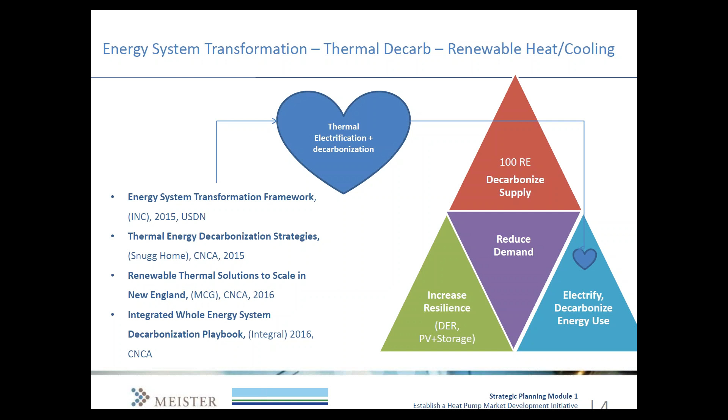So, all right, let's jump in. No more intros here. So we're jumping into Module 1. So there's 3 pieces, A, B, and C. We have framing the initiative. So we're going to jump into why heat pumps in the framing of the energy transition. How heat pumps work, look at some of the technology details. That's what Meister's going to present next.

Then we'll dive into mapping your system and forming your advisory board, so looking at who all is in your area, naming them, and sort of placing them in this sphere of influence, if you will. And if you're familiar with the Integral Playbook, they talked about that. So we'll be drawing on that in that section. And that will help you form your advisory board if you haven't already.

And then we're going to look at some of the basic barriers and opportunities. Of course, we're going to ask you to take that further in your homework for the local context, but we also are going to just address some of what the typical barriers and opportunities are when we're talking about launching our heat pump programs. Sarah, and then, yeah.

I just wanted to note for everyone, while this first part, framing the initiative, may seem like it's review or even redundant for some of us, part of the reason that we're going through these slides is that this has all been built so that it can be support material that you can use as you go out to form advisory committees or to build stakeholder relationships. So think of all this as also materials that are available to you for your use.

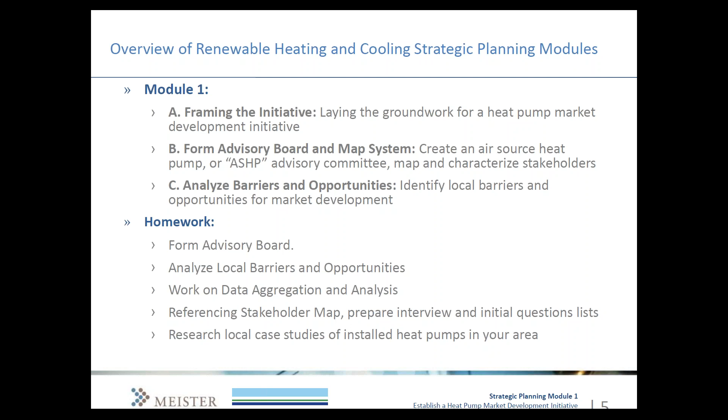And then the last thing is the local case studies. So this is what we refer to as the installation baseline, and that's looking at installed heat pumps in your area, and the city and the advisory board will lead on pulling out some of these local case studies, but the consultants will lead on compiling the case studies. So that is where we're going to dive into all these pieces. That's what we're doing today, Module 1.

Next month, Module 2, we're going to move into D and E. So we're going to do the market development assessment, establishing the baseline of heat pump systems installed to date. Segmentation is looking forward, so finding that high value target in your area, and then we'll start to map strategies on how to launch and get heat pumps in those buildings.

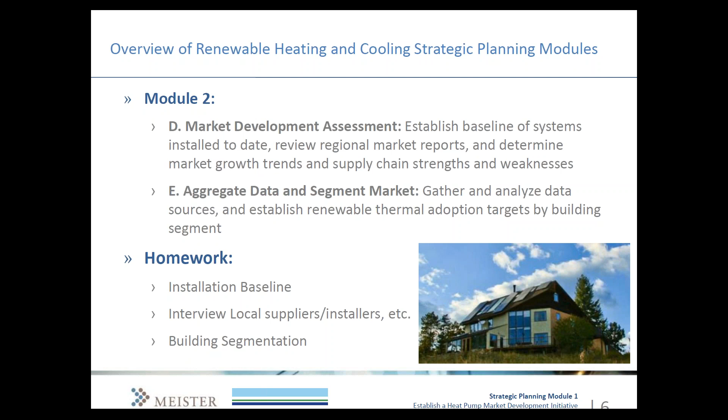So the homework for Module 2 is going to be completing the installation baseline. So again, looking at how the heat pumps in your area are performing, then interviewing the local suppliers, installers, contractors, and then finalizing the building segmentation.

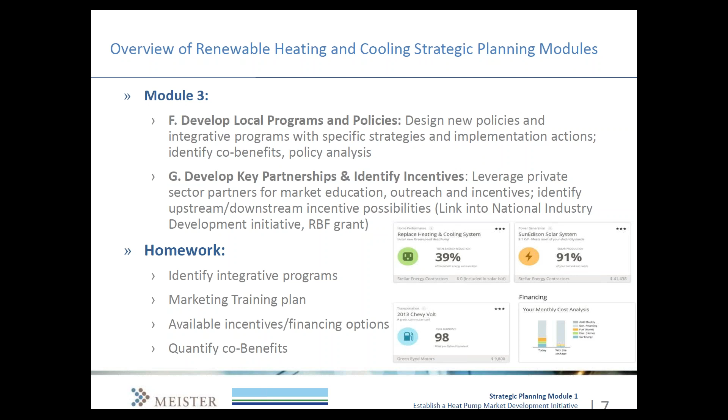So the homework coincides with those pieces. So you'll end up identifying what your integrative program will look like, the marketing and training plan for the installers, and then we'll also identify the available incentives, start to tee up the third-party financing options, and quantify the co-benefits. So that'll be, again, not all led by you. We'll be splitting up who does what. You can see that in the other PDF.

And then the fourth module here is the final piece, developing the implementation plan. Here we'll basically put all the pieces together, build the roadmap for your renewable heating and cooling launch, and actually coordinate the partnerships necessary for financing, and we'll do lots of homework there. So develop the full plan. We're going to develop the engagement and outreach plan, as well as the training dissemination plan. Hopefully we'll have a messaging outreach partner by this fourth module to help you frame what your outreach will look like to the key actors and segments that you've figured out through this process.

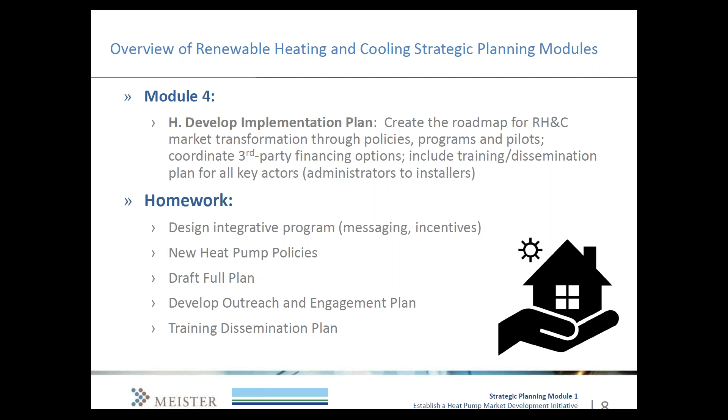Sorry, this is Laura. Can I ask a quick question in terms of timeline for these modules? Is that laid out somewhere? Yeah, so sorry, actually it was on the kickoff call, but I didn't put it back in here, but they're monthly. So it's basically the third Thursday of every month. For the next 4 months, we'll go through these 4 modules. So we encourage you to have your advisory board meetings in between there to help move the homework pieces forward and whatnot.

So that's March, April, May, and June, and then in July we'll have a 5th webinar, but that will be not presenting content as much as synthesizing what we've learned and putting it all together. And then in August, I haven't got the final date yet, but hopefully we go to Rockefeller Brothers for that manufacturers convening end of August, early September, something like that.

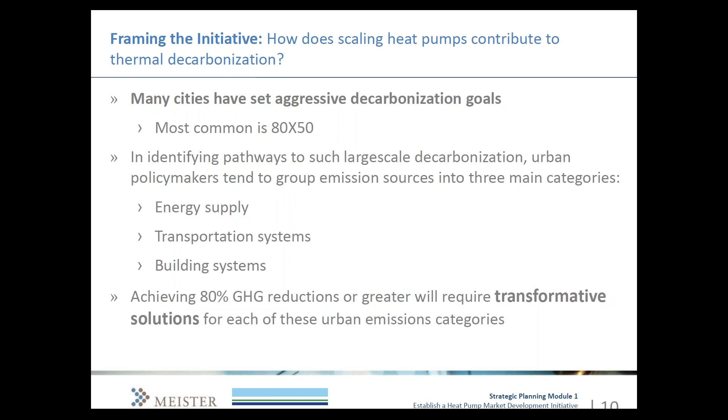In order to begin that process, policymakers have started grouping greenhouse gas emission sources into 3 broad categories. And this helps with identifying strategies for reducing those emissions within each sector. Commonly, those are grouped into the 3 on the slide, so energy supply, transportation systems, and building systems. And I don't need to tell you all this, but achieving that level of reduction will require really transformative solutions for each of those emissions categories. Next slide.

So luckily, a number of efforts have already begun to identify and recommend policies and programs and technical solutions that can help achieve that type of transformation. And Sarah touched on a bunch of those at the top, particularly some of the CNCA energy systems transformation projects, which really set the groundwork for how we talk about this type of project. I might add to that list an ongoing project we're doing with the Innovation Network for Communities, Inc., and CNCA, and the Kresge, Summit and Energy Foundations that is focused more on the intersection between energy transformation and equity planning.

And I was excited actually to see we have a few people from CU Boulder on the call, because you guys have done some really interesting work on that front too. But this project kind of characterizes the ways to improve social equity as a result of this systemic change. And we're anticipating we'll have some final reports from that process in April or May, so we'll be sure to send them your way once they're available.

But regardless, each of these efforts have identified numerous large-scale solutions for how to reduce emissions in each of those broad sectors. And most of those solutions are already being implemented or could be implemented using today's technology. So a few I highlighted on the slide here include leveraging franchise agreements to encourage utilities to scale up the procurement of renewables or the mix of renewables in their generation portfolio. So Boulder has done a lot with this, and also looking into municipalizing, as has Minneapolis.

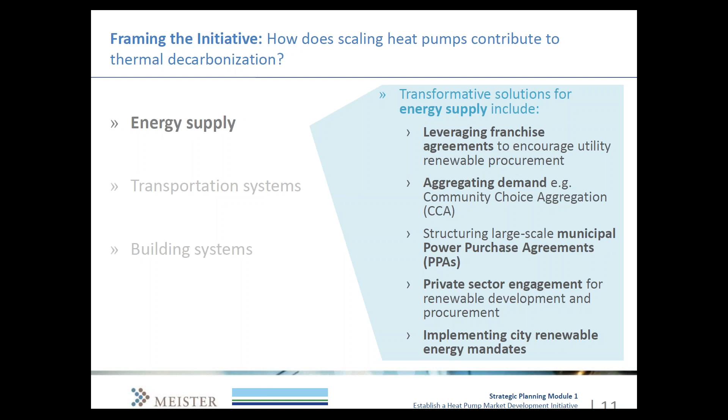Of course, partnering with the private sector for renewable development and procurement is big, or otherwise encouraging the private sector to do procurement on their own. Cities have a lot of leverage, but having that partnership and private capital can go a long way too. And in some cases, implementing energy mandates to achieve this. So I think San Francisco recently adopted a solar mandate for new construction shorter than 10 stories. So these are all just a quick snapshot of kind of the cutting edge of strategies that leading cities are employing for transitioning energy supply. Next slide.

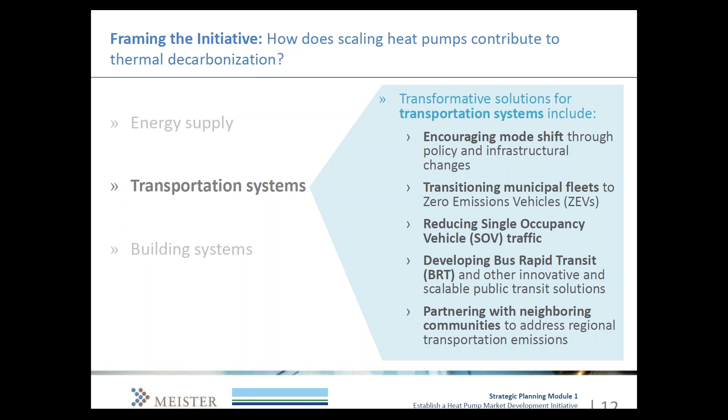Next slide. And then, of course, there are the building systems, which is what this initiative falls into. So among those are reducing building energy consumption through weatherization and efficient appliance changes, transitioning, of course, to renewable heating and cooling systems like we're working on here, mandating efficient operations and appliances in new construction, and utilizing waste heat from industrial processes or through combined heat and power generation. All of those are important and kind of trending strategies for transitioning building systems emissions.

But if you go to the next slide, these top three are all fairly significant components of this particular initiative. So the process that we're working on here will contribute to each of those transformative solutions. So next slide.

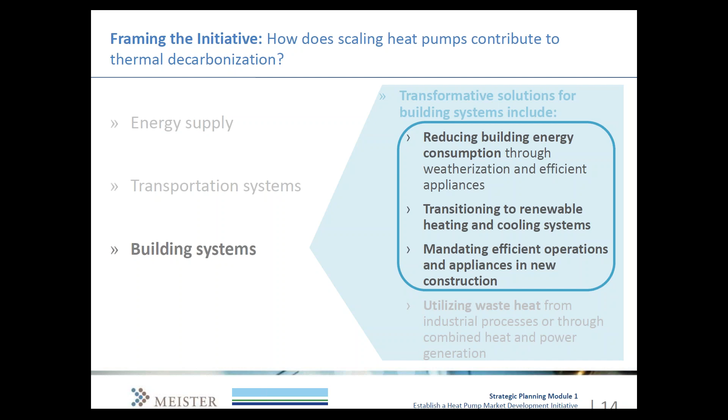So that's all helpful framing, but it still begs the question that we've had at the top all along, which is how does scaling heat pumps contribute to thermal decarbonization? So generally speaking, renewable heating and cooling is defined as technologies that can utilize renewable energy sources to provide space heating and cooling, domestic hot water, and process heating.

And today, there just aren't any perfect solutions available or scalable. Biomass has some controversy around it and can spark heated debates around how to conduct carbon accounting. Solar hot water can be great, but can't serve year-round in most temperate climates. And heat pumps rely on grid electricity to operate. That said, unlike most incumbent heating technologies, heat pumps have the capacity to run on exclusively renewable energy. And that is a big part of why we categorize them as renewable heating and cooling technology. And they contribute to the process of electrification, which is currently being explored in many leading jurisdictions.

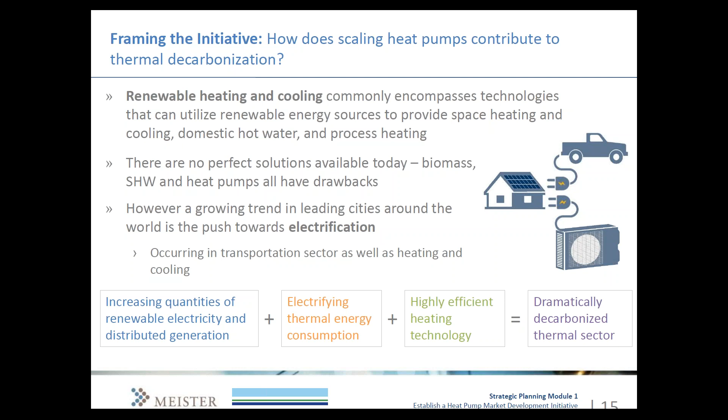I'm sure you all got that email from Brett earlier this week with the timely article about the President of California's Public Utilities Commission advocating the need to not only transition to 100% renewable electricity supply, but to actually leverage electricity as a fuel to cut into the market share of oil and natural gas. That, he stated, is what it will take to reach a target like 80 by 50. And it's that same process of electrification that this initiative is driving towards. So next slide.

So of course, the method by which heat pumps contribute to decarbonization is clearest at the building scale, where they can directly displace high carbon heating sources, especially oil and propane, and even pair with on-site solar, which together can provide building-wide decarbonization solutions. But for system-wide benefits, those can only really be felt if they're paired with city or regional electricity supply transformation efforts, such as those listed earlier.

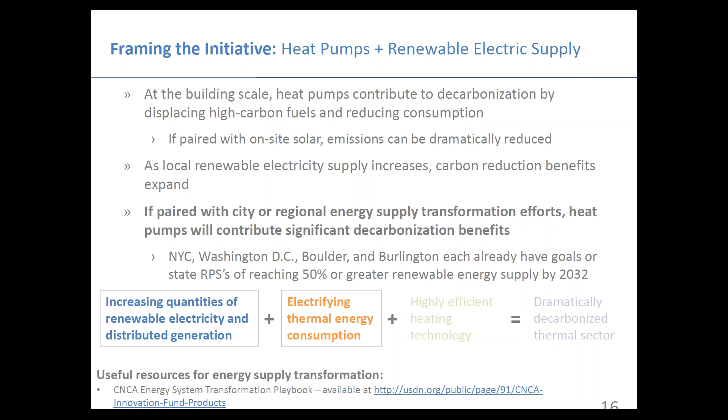But each of the core cities involved in this initiative already have significant renewable energy goals, and in general, renewable energy is a few years ahead of thermal in terms of the transition process. So having that in place and then pushing for increasingly aggressive targets and greater and greater percentage of renewable electricity supply in each local grid will just expand those decarbonization benefits, especially as things become more and more electrified, both on the thermal side and on the transportation side. Next slide. Great.

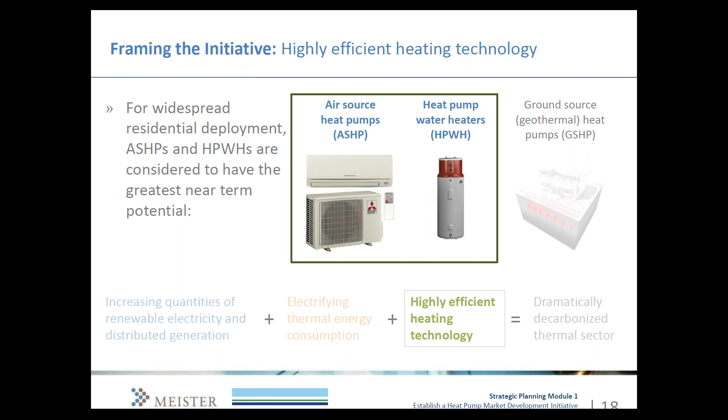So in addition to this type of city-scale renewable supply transformation, you need, of course, the high-efficiency heating technology. And of those, these three are kind of the most commonly talked about. Next slide. For widespread residential deployment, generally we consider air source heat pumps and heat pump water heaters to have the greatest near-term potential. And that's largely just due to flexibility and cost for urban areas, though of course ground source has a lot of potential as well. Next slide.

So some of the reasons that these two are particularly promising is they can offer year-round performance. So modern cold climate heat pumps provide heat on even extremely cold days, but I'll talk about that more in a minute. They also offer high efficiency cooling, which can help reduce summer load if displacing older air conditioning units and provide greater comfort as summers grow increasingly intense. And they're an extremely flexible technology. They can be adapted to so many different home layouts, sizes, and locations, which is really important for the diversity of urban housing stock.

Some common model differences I might quickly run over include ducted, which of course integrate into existing ductwork and utilize standard air handlers to distribute heat, or ductless, which have indoor fan heads installed, which are then connected to outdoor units just through narrow refrigerant pipes that run between.

They can also be used to serve a single heating zone, in which case they're commonly more of a supplemental heating source, or multiple zones, in which case sometimes they can be scaled up to serve an entire house, especially if they're integrated into ductwork. It's worth noting that in the Mid-Atlantic region, where DC is, a far greater percentage of heat pumps serve a whole home and are ducted. But in other areas, it's a little bit more common that they're supplemental or partial heating solutions.

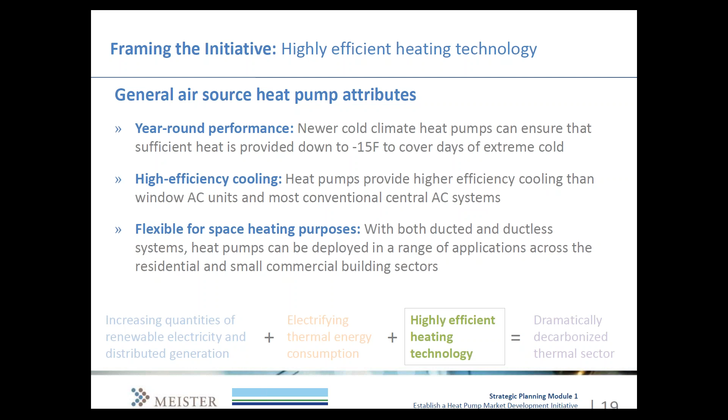Next slide. So as a technology, though they also run on electricity, air source heat pumps are fundamentally different than electric resistance, and actually than most counterfactual heating systems, in that rather than creating heat, they transfer heat in and out of a building. So the technology that they run on is functionally pretty similar to a refrigerator, which of course has coils on the bottom that are usually hot to the touch, and that's because they're transferring heat out of the inside of the fridge and distributing it out in the space around it.

And the heat pumps kind of do that in reverse, though they can do it both ways. They use the outdoor air as a heat reservoir to provide heating and cooling and transfer that heat either inside the house for heating purposes or from the house to the outside air for cooling purposes. And because that ability to transfer heat depends in part on the amount of heat available in the surrounding air, heat pumps' ability to serve a whole heating load can depend a little bit on the climate zone or the season or even the level of insulation or weatherization that a building has. But that's also changing as the technology grows increasingly advanced.

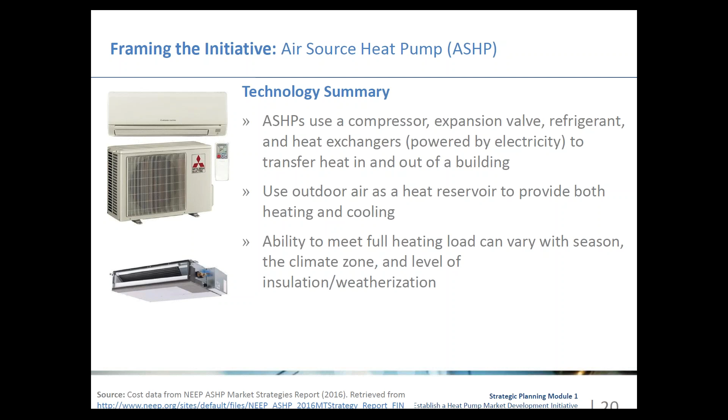Next slide. Let me pause there for a minute before I continue on with the heat pump distinctions. Does anyone have questions so far on what we've covered?

All right, forging ahead. So as previously mentioned, these are particularly versatile technologies, and that is in part represented in the price. So a single zone mini split, as it's commonly referred to, can run for about $4,000 for its full installed cost, whereas whole home solutions run up to about $13,000. The top picture on that slide is an indoor head of a mini split, and the bottom is the common air handler for a ducted whole home solution.

So that range in pricing and corresponding range in applications is pretty unique to heat pumps, which makes them suitable for so many different locations. They're also relatively cost-effective compared to ground source or pellet boilers or some other renewable heating and cooling technologies. Of course, the prices are usually higher than counterfactual heating systems, but especially in a place like DC, where most people will want an air conditioning unit in addition to a heating system, getting both in the same unit can save a significant amount of money overall. And with the resulting monthly savings when switching from electric resistance or oil, heat pumps will ultimately pay for themselves despite the higher sticker price.

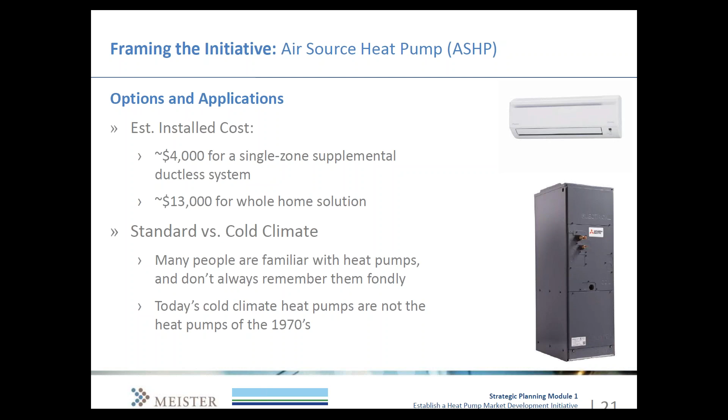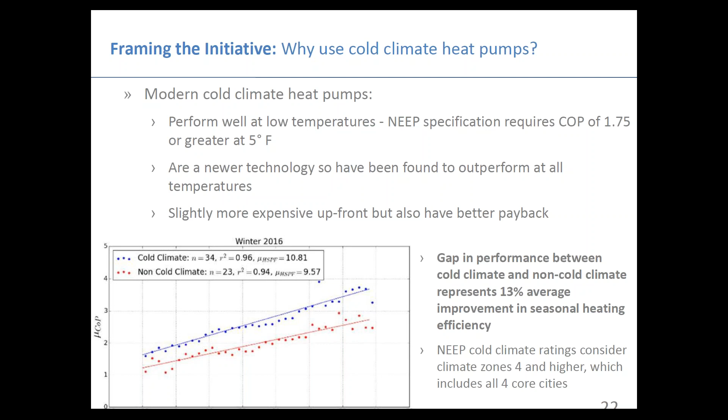Yeah, I fully agree. I think that's a really good point. We need not get locked into a full replacement approach, and in some cases displacement makes a lot of sense. Great. Yeah, I also agree. I was talking more just about the distinction between cold climate versus standard, but certainly there are many other distinctions that can be made or ways this technology can be adapted. A lot of the benefits you'll see will depend on the scale of the retrofit that's needed, and so utilizing existing heat distribution infrastructure is going to make a lot of sense. Great. So Sarah, you want to jump to the next slide?

So the other main technology we've been thinking about for this initiative is heat pump water heaters, and they function pretty similarly to air source heat pumps, but rather than transferring heat from outside air into air within a room or into ductwork, it transfers heat into a water tank. Those water tanks sometimes incorporate electric resistance elements for high usage times, because the heating can take a little longer to regenerate, so if you have a whole bunch of people showering at once, it can be beneficial to have that electric resistance backup. But generally, they function quite similarly to an air source heat pump.

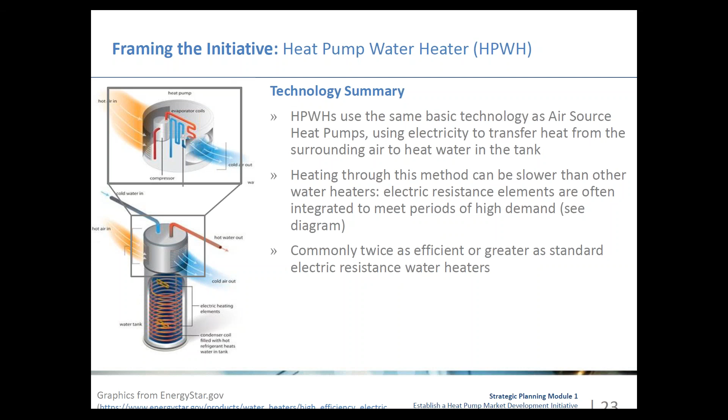Next slide. Can I ask some questions? So you said commonly twice as efficient as an electric hot water heater. Do you have it compared to maybe a condensing gas boiler? I don't have that comparison offhand, but I can certainly track it down. Okay, and the other question, I guess this is actually benefits and challenges: what size building would you say is really the limit for putting in one of these, or are there issues putting in a series of these that larger buildings could take advantage of?

I know that a standard residential one is usually about a 55-gallon tank, and so I think that would be kind of a single-family or 1 to 2 family solution, but I think there are larger tanks. Do you want to jump in there, Neil?

Yeah, I was going to say on the condensing boiler, y'all correct me if I'm wrong, but that gets what, efficiencies of like 90, 95%, is that right? Generally for a condensing boiler? Yes, around there. So the energy factor, do you remember, Nate, on heat pump water heater, right? Like 2 or 3? That's right. So in theory, it is more efficient.

There's this really interesting debate that we should wade into at some point about site versus source energy use as well, right? A lot of policymakers will try to take into account the transmission distribution losses of electricity that power the heat pump, so they can work back to think about what's the greenhouse gas emission reduction at the source, at the power plant. And is the heat pump operating efficiently enough to reduce greenhouse gas emissions there?

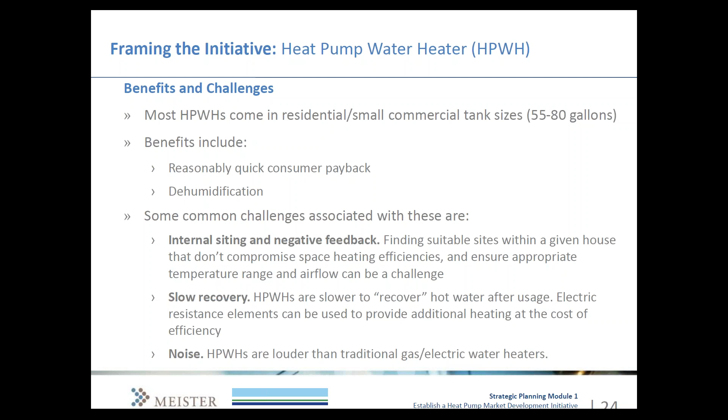That's interesting, especially when you think about, one of the projects some folks here are working on is a grid-enabled hot water heater. So the grid would actually tell you to turn it on. So that could be a problem. There's a very interesting group in West Virginia that's been doing grid-enabled hot water heaters for some years now and showing some great success. So it's very exciting and definitely possible with these heat pump hot water heaters.

But you can't. Well, unless there's some new and better technology. I have a GE unit, but you can't put one of these things in a closet in your living room, which obviously also makes it harder from an air exchange perspective. But this question of separating the compressor outside from the tank inside would be one solution to solve that problem. Yeah, that's something we can pose to the manufacturers as well. Put on one of the additional lists of things for them to think about is the noise factor. Totally. Yeah, definitely. Get that on the list too.

Okay, great. It sounds like everyone's pretty clear on the technical specs then of the heat pumps and, as you think about how they might match your top building segments, what that might look like and how the sales pitches will go and the training. So if you have any specific questions on that between now and the next video, for your specific locale, make sure that you have...

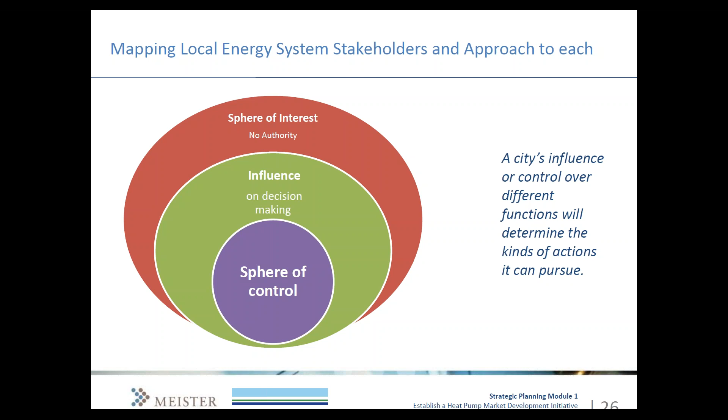So we want to be able to launch at the end of this. So we want actions that are actually targeted in the right way for each stakeholder. So this is sort of a frame. And then you're going to create the larger map there. Then we're going to move into the discussion now.

So I want the cities to go around and talk specifically about, I'm assuming most of you have already started your advisory committees, but if not, then talk about how you want to start your advisory committee, who will be the local coordinator, and in most cases it's you, the lead person that's on the phone right now. And then who should be at the table? Who's at the table now, and who do you think should be at the table?

And this advisory committee is really going to help you in this process of forming your air source heat pump initiative. And they're going to help with the quote-unquote homework, and they're going to support you to see the barriers and opportunities as you go along. So

typical stakeholders, we've started a list here, but depending on your city, it could be different, but certainly the utilities, we've got homeowners and landlords, and in some cases it's building owners, operators, and their maintenance team. We have the real estate developers, the contractors, and of course the installers, manufacturers, and distributors. So we're working with them on a national level, but maybe there's some local offices that you can reach out to as well.

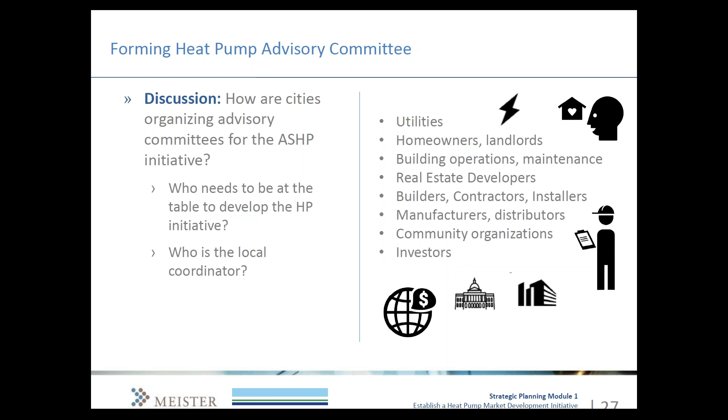All right, great. That's really interesting. I can't wait to see the entire city as a 2030 district, and that seems like a great platform. So, thank you, everyone. We got your map started here just by that conversation, and I'm going to pass the baton to Neil to bring us home. I am supposed to do the homework after you finish, Neil, but if we run out of time, then that's okay. We'll just point you all to the documents and have you look it over.

Or do we run till 4? Is that correct? Yeah, and it's a hard stop for me. So if you want to go over the homework, I have to run out. It's 1 o'clock my time. But yeah, go for it. Okay, I'll try to be concise here then.

So the general expectation is that most jurisdictions in the U.S. are probably in the pretty early stages. And based on the best available data we've seen so far, it does appear that heat pumps are the market leader when you compare them to other renewable thermal technologies like solar thermal or biomass. But regardless, there's still a lot of work to do.

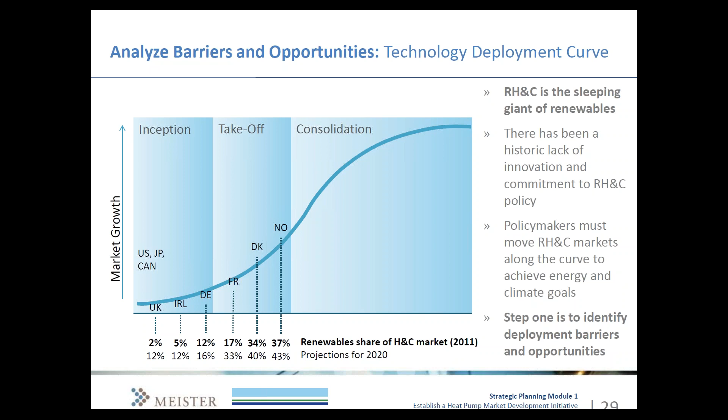There's been a lack of policy support, a lack of innovation for renewable heating, including market development. And so the work that we're looking at here to do together is an important next step. So with that in mind, there's a number of barriers that are pretty typical in most markets. If you advance one slide, Sarah, we can look at what those barriers are.

So there's a lot of technical and building barriers, chief one being that there's low refurbishment rates for most heating and cooling equipment, right? So most heating and cooling systems are in place for 15 to 20 years, in some places 30 years, right? Interesting thing about heat pumps is because they can serve as a displacement technology, you can help to put a dent in that low turnover for heating systems by using a heat pump to displace part of the load and provide cooling to an end user.

In addition, there tends to be inadequate performance data, and this is field data that I'm talking about on how heat pumps perform. So there's been a handful of studies, and not many, that have looked at the performance data of heat pumps in situ, but there's more work to be done there. I would also note that in a lot of the recent studies we've been reviewing, there's been real challenges getting heat pumps to work in tandem with the existing heating system. And so oftentimes there's operational difficulties that really should be overcome by making sure that the heat pump has the proper controls to integrate with the thermostat or wireless thermostat in the existing fossil fuel system.